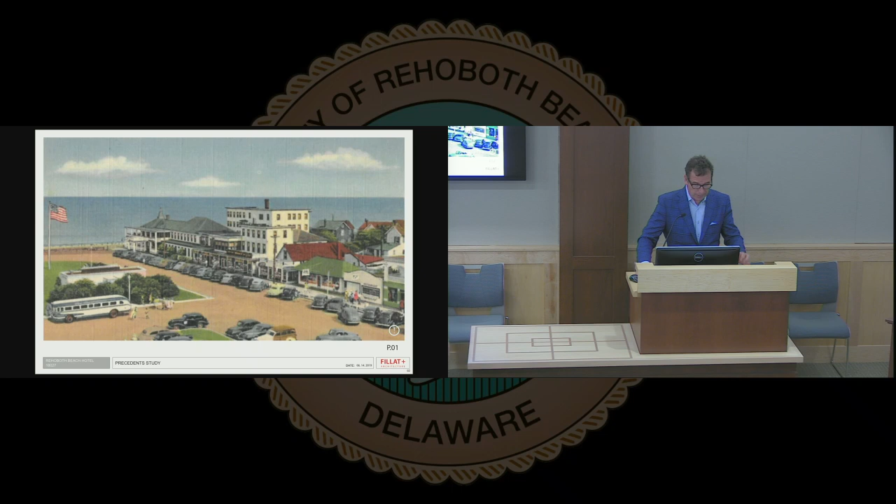Just to take you back to a quick view of what once was, and our kind of inspiration for what we would like to be. That is a building that is a beautiful white structure with fantastic green roofs and architectural embellishments, finials and smokestacks.

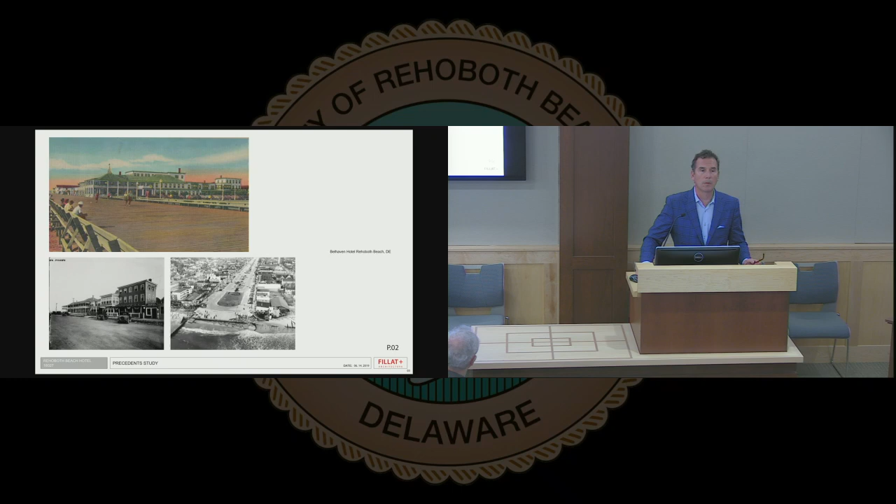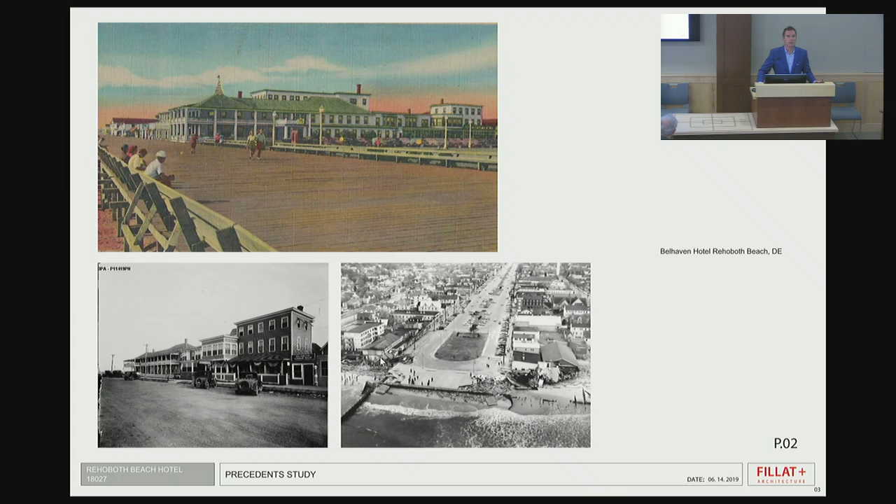Here's another old image of the Belhaven from the boardwalk, both in color and in black and white in the lower left-hand corner. And this is actually a photograph of the storm, where you can see the Belhaven here is no longer—at least the majority of it, or the main portion, is no longer there.

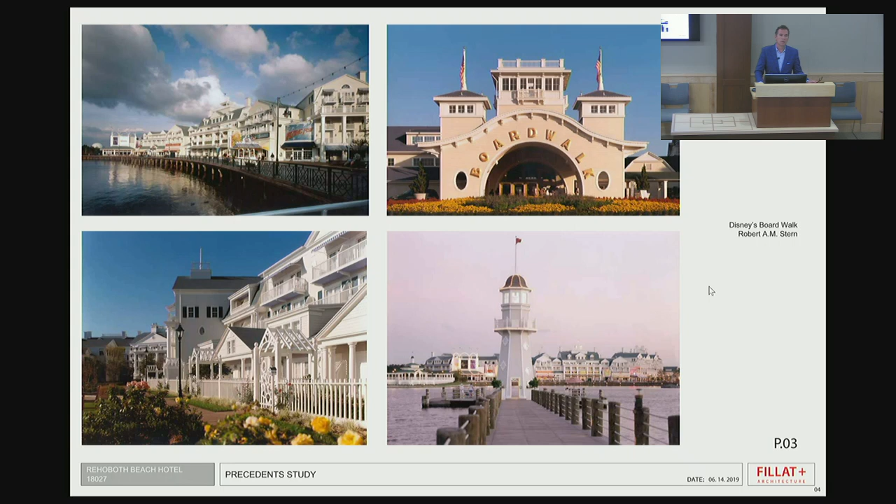I want to go back to our inspiration, the classical inspired grand hotels that have been built with contemporary materials and contemporary demands of the upper-end traveler. Disney World is a great place to have those kinds of facilities.

Really interesting, these buildings have this architectural character—the masses of the roofs are sloped, they have color, there are finials, cupolas, balconies. All of this kind of architecture, these buildings were actually inspired by the Belhaven. They just didn't know it, right?

Let's go through the site real quick, then I'll go into the floor plans. Here's our site—it's kind of a zigzaggy site. It meets the corner of the boardwalk and Rehoboth Avenue here, and then it runs along Wilmington Avenue, just half a block or half a building off of the boardwalk in this location.

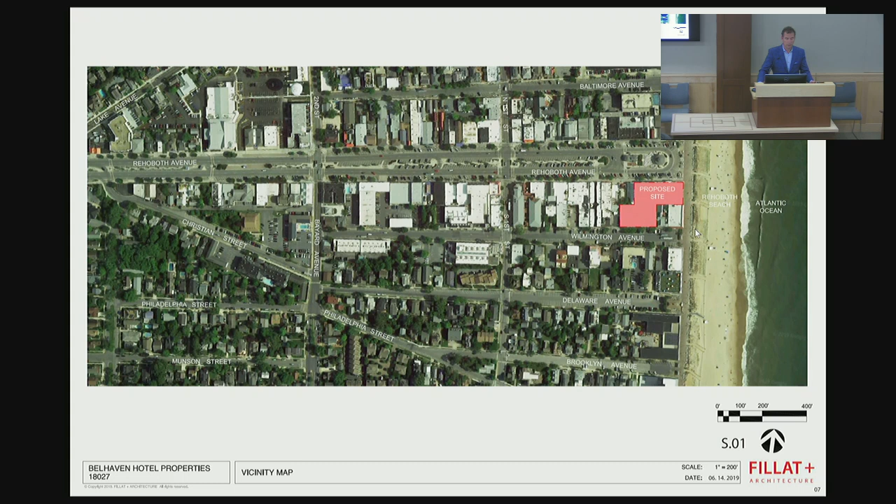So what we were able to do is maximize the parking. As we've talked about, there's 110 spaces below grade, but thanks to our forward-thinking attorney, we've shown where scooter parking can be and where bicycle parking can be. So it's not just a parking garage for cars, it's for alternative means of transportation.

Underneath the ramp here, this is the entry ramp, that's a good spot for bicycle parking. Adjacent to these stairwells, we have enough space to put a little bit of scooter parking and that kind of stuff. Who knows what they'll invent next? Maybe motorized surfboards.

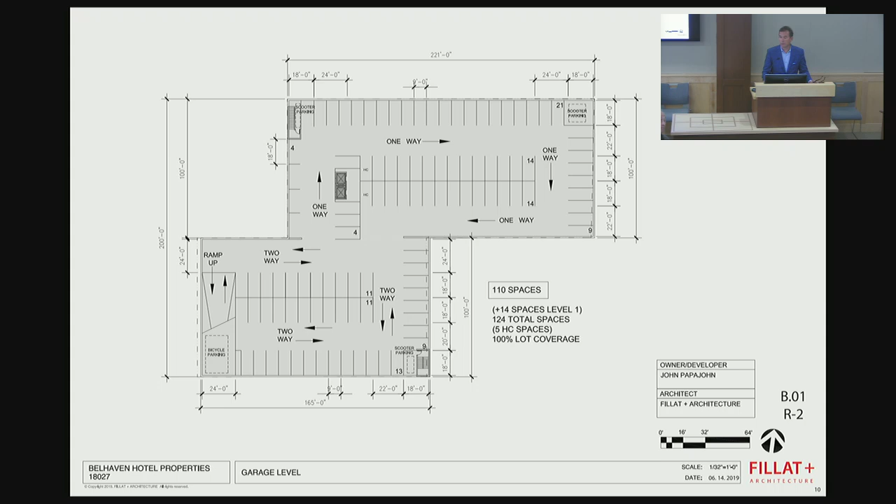This is an exit here. This is the other exit from the top of the building here. This is an exit from the parking garage, and this is an exit from the parking garage over here.

We've got another 14 spaces in this area over here, which is sort of covered, and that's how we get to 124 parking spaces. There's a couple of handicap parking spaces right next to the porte cochere, and the entrance to the parking garage is over here off of Wilmington Avenue. That's the entrance and exit to the below-grade parking.

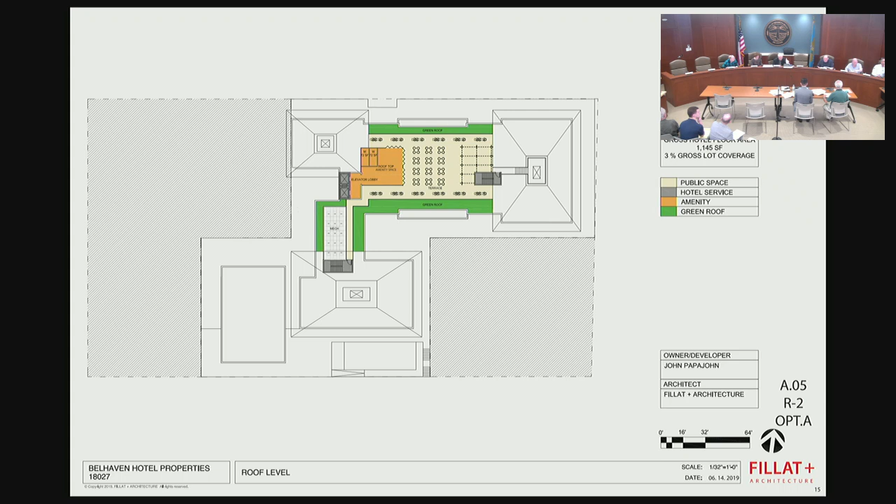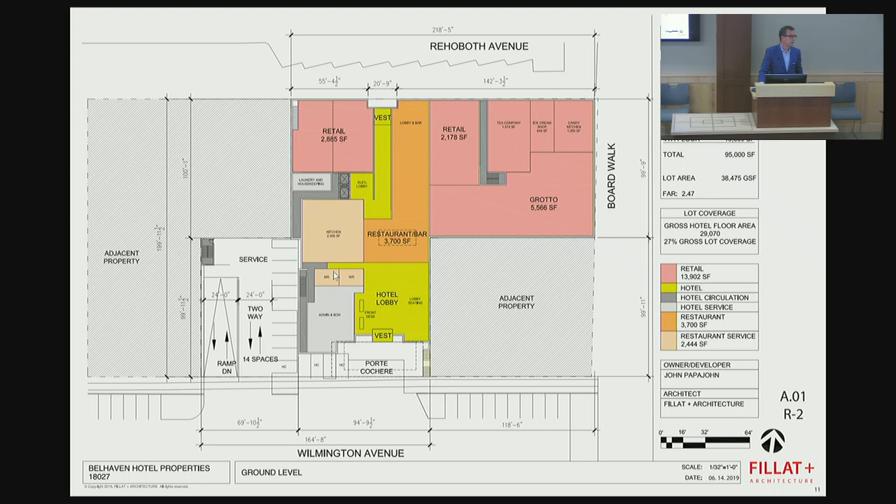So what happens is that stair, because this is a taller space, runs over top of this corridor, right? It connects right there—that's this staircase. It goes up and connects directly into that stair.

On the upper level of the building is another little articulation here. There are balconies—this is the only place where there are shared balconies. We did this to articulate this edge of the building and make this piece feel like 3 stories as opposed to 4 stories.

You can see that the building steps back along Rehoboth Avenue, along the boardwalk, between us and the building adjacent to it, between us and the lot adjacent to us on Wilmington. And then there's a large setback off of Wilmington Avenue because that's where the pool is.

I want to go back a minute. We pulled the ballroom out so that this ballroom will be divisible in 3. There will be a divisible here, there'll be another, and it'll be 2 in a larger room here. This room will actually be able to see the water—you'll be able to be in there, look over the pool terrace and see the ocean. That's the reason why we did this, and it should be really spectacular.

Typically, if you've got a ballroom, you're probably serving food—how is that going to get there? That's a good question. This gray area here is the service corridor. We'll actually double use this elevator right here, so if you're a ballroom guest, you'll push the button in these elevators and you won't go towards the guest rooms, you'll go towards the back. This orange is the guest circulation, and it also has access out to the terrace.

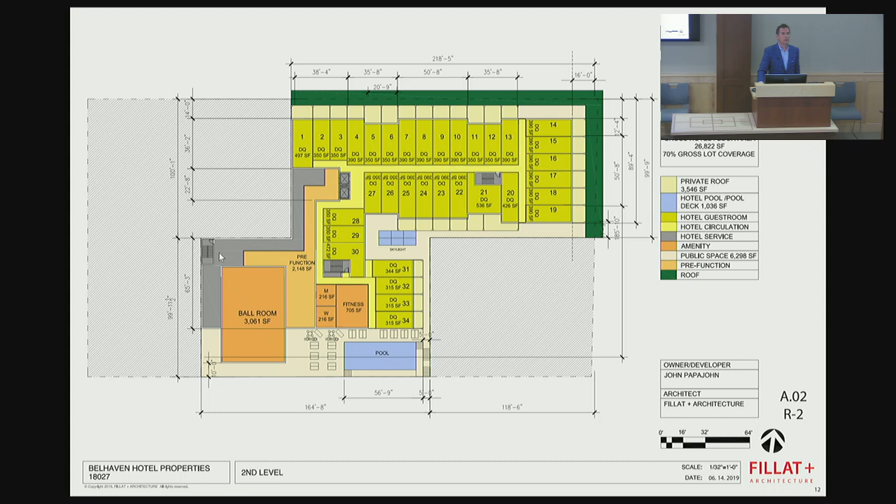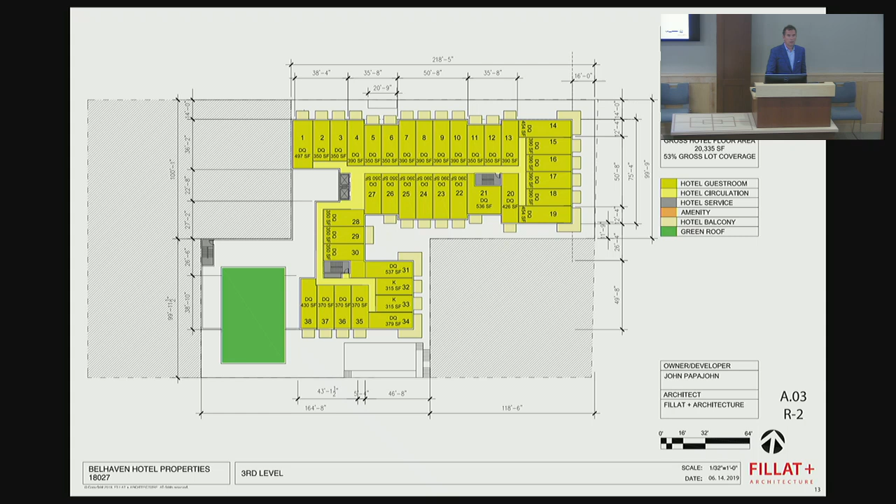Okay, so our last wish list item is the opportunity to use the roof as some kind of hotel amenity space, a sun deck, call it whatever you'd like to call it. As a result of that, we have 3 options for doing this.

The first option basically has a small enclosed space with a terrace and restrooms, and it's located kind of in the middle of the block. This first option articulates 3 pavilions—1, 2, 3—and a finial on top of each one. They are inspired by the big roof of the historic Belhaven. We believe this is probably the most invisible of the roof terraces we're showing you.

We were also thinking maybe you could do something where you'd have a staircase coming up and wrap around the finial, so you could actually get up here, walk around the finial and look out and see the ocean. So it'd be kind of spectacular.

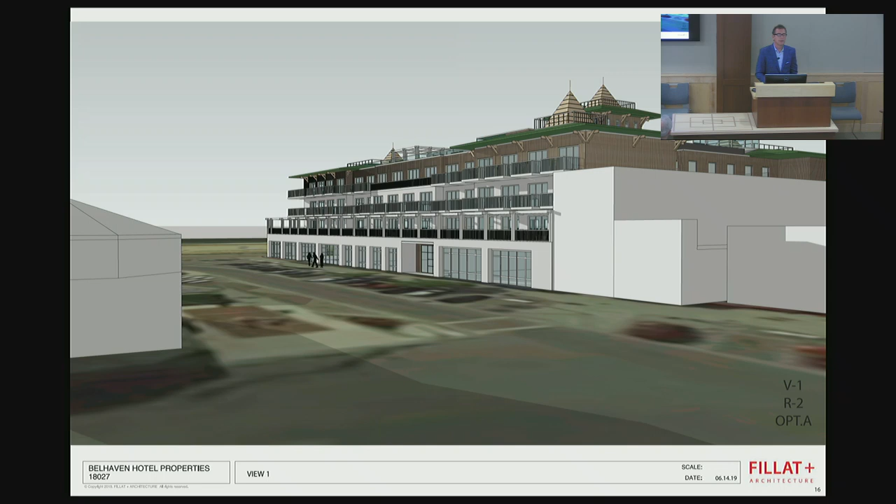So this is a series of images showing what this looks like—these are the same images. The only thing you really see here is a little trellis space that covers part of that rooftop. The elevator overrun, we decided to make something out of it and make it sort of the tallest of the pavilions. And then you see that there.

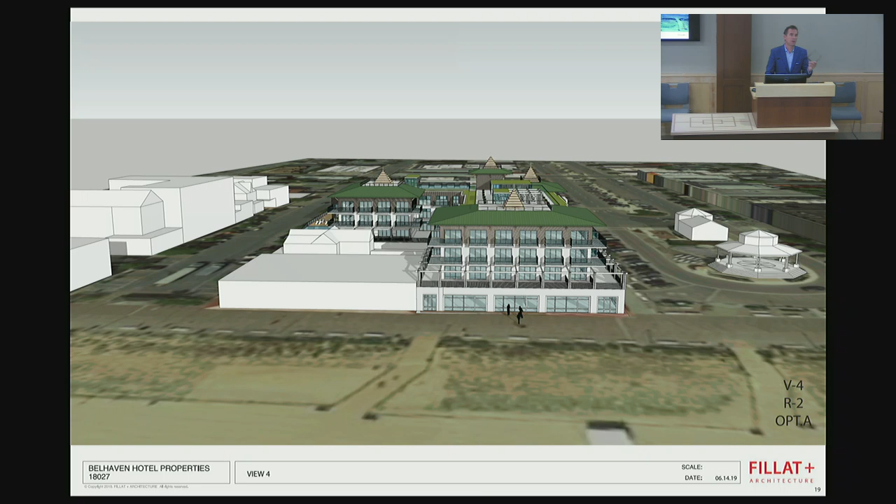So this is coming down Rehoboth Avenue, looking at the building—there's the roof terrace here. As you can see, even though we're up in the air with these views, you do not see very much of the roof terrace. These are the same images we showed you previously, so you have an opportunity to see the apples to apples view.

So this is what we're calling option A. Here you can see there's the roof terrace, there's the pool, there's the zero edge pool, and the private roof terraces.

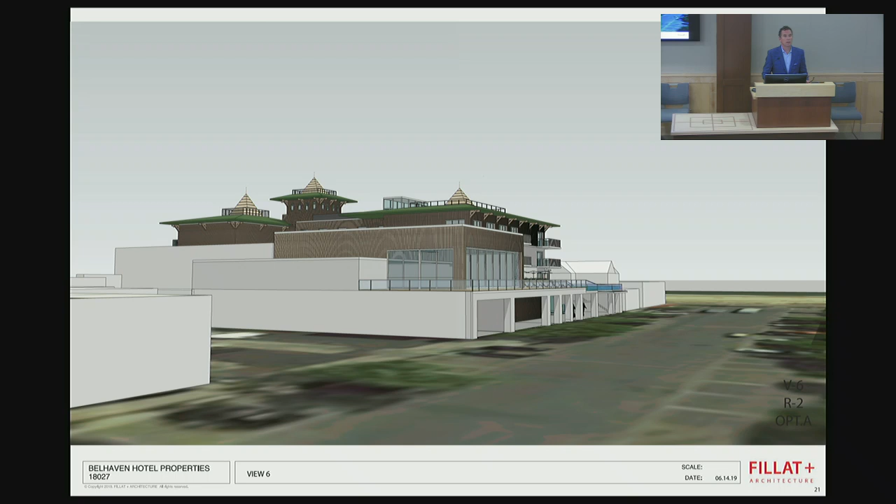Is the building height in option A the same as the one you showed us last month? Yeah, the building height is always 42 feet, typically. We did have a conversation about raising the building height for a bigger, taller restaurant space, but we felt that was too big of an ask. So our eave height is 42 feet. But option C is taller than that. Well, all of them are taller than that because they have the rooftop enclosure.

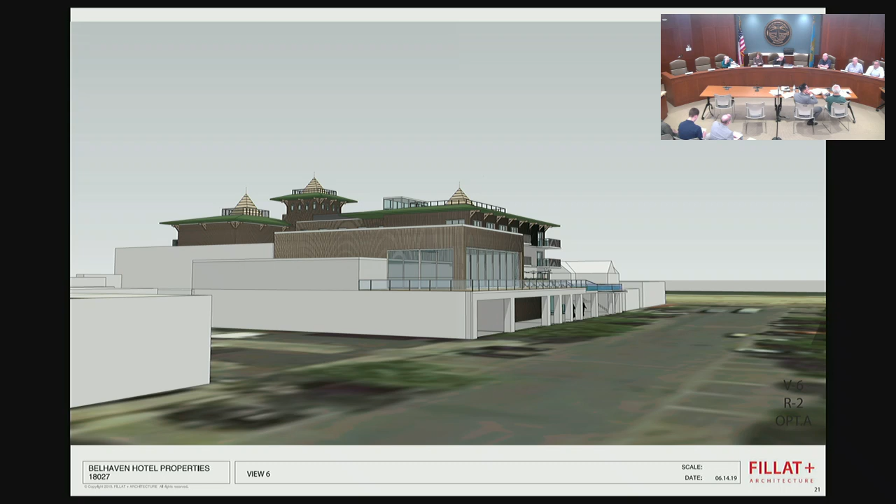So the mass of the building is always 42 feet, but they all have a rooftop enclosure where it's taller—that's an additional 15 feet because of the elevator overrun. And to use the rooftop, you need 2 means of egress.

Am I correct about needing 2 means of egress? Yeah, right. And they're shown on the plans. I'll show you the plan. Let me just blast all the way through this option, okay?

So one of the thoughts we had after looking at option A was that we have these kind of cool roofs. Why don't we occupy one of the roofs and make that the pavilion? So rather than have a separate bump-out box here, we made one of these pavilions taller. That's what we did in option B. We took the pavilion in this corner and made that the place where it would be taller.

And so there's the amenity space, there's the roof terrace, and the 2 elevators that connect to it. There's one staircase that connects this way, and there's one staircase that you walk through the outdoor space to get to, the elevator, the second stair. All right, so this looks like this.

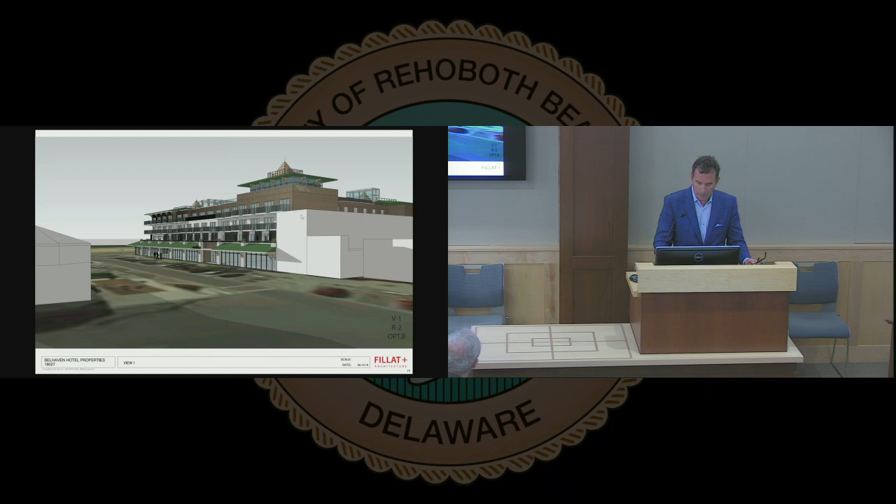We thought this was really an interesting solution because it takes the tallest part of the building and moves it away from the beach, which, if there was a concern about that, this would be successful. But what it does is it actually puts the height of the building right adjacent to our neighbor. So, with one solution, there's another problem.

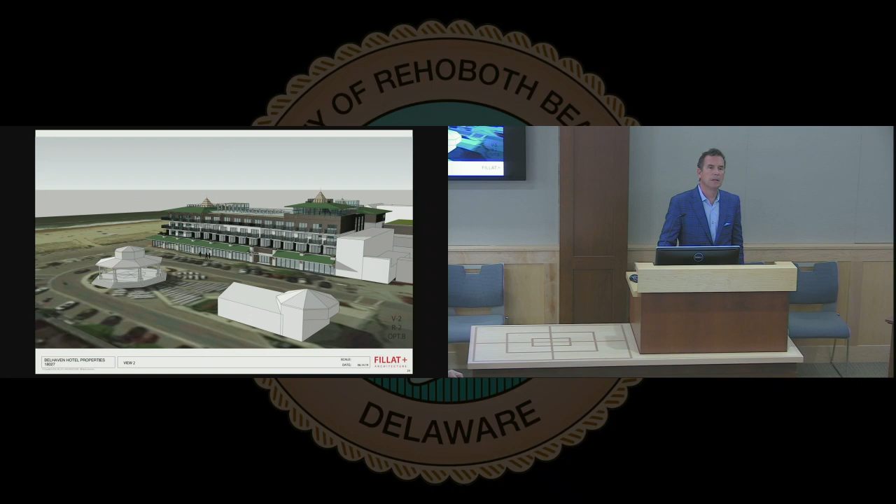So this is just walking around that alternative, and you can see that we really like this scheme. It makes a beautiful space out of the pavilion.

And the second part of this design that's different than the previous solution is that we eliminated the second level structure, and we put a continuous cover over top of the sidewalk along the building's edge. The reason we did it is we took the green second-level porch of the Belhaven and put it down on the ground level. It was something that John felt was really important for us, as a place of refuge during the rain and for people getting out of the sun.

So we felt this was a good solution for that. Maybe it's a little too much of the same all the way around the building, but it at least articulates the idea in a good way. And we feel it still keeps that character.

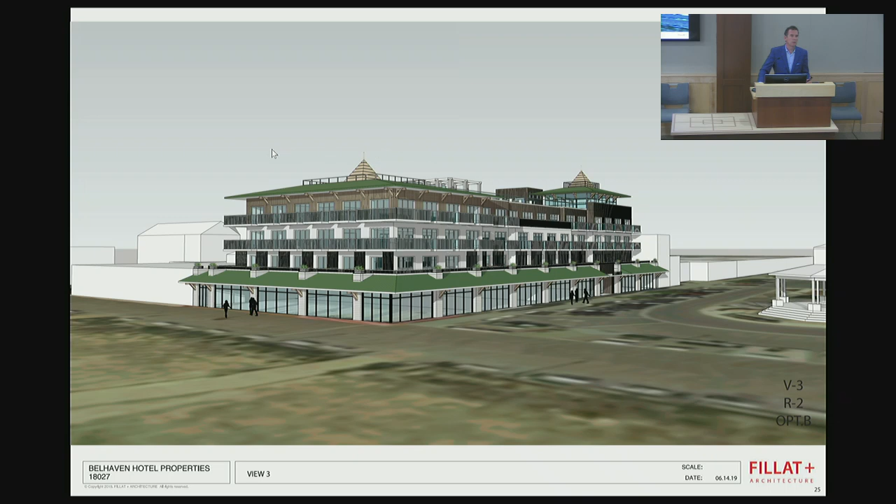So you really have a roof here on the ground level, or at the first floor, that creates a nice human scale, pedestrian scale along the base of the building. You have nice balconies that are uncluttered above, and then the character of the historic rooftop and second level. How much of an overhang? 6 feet. 6 feet? Yeah.

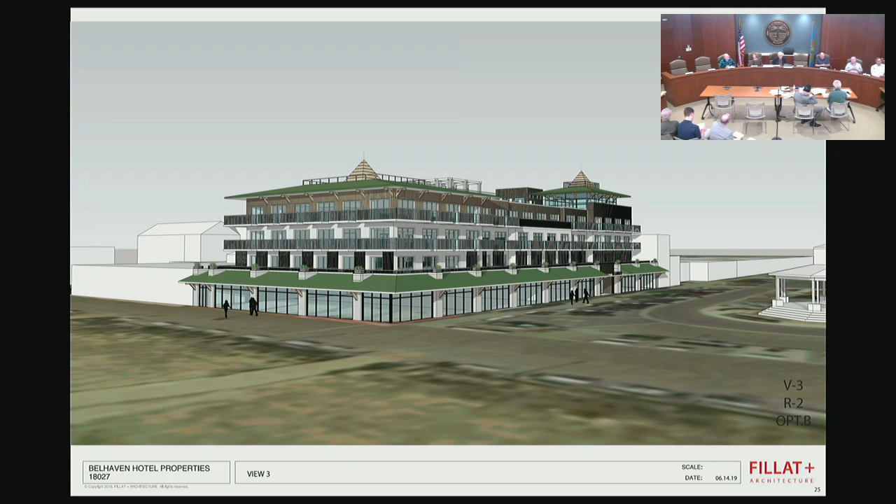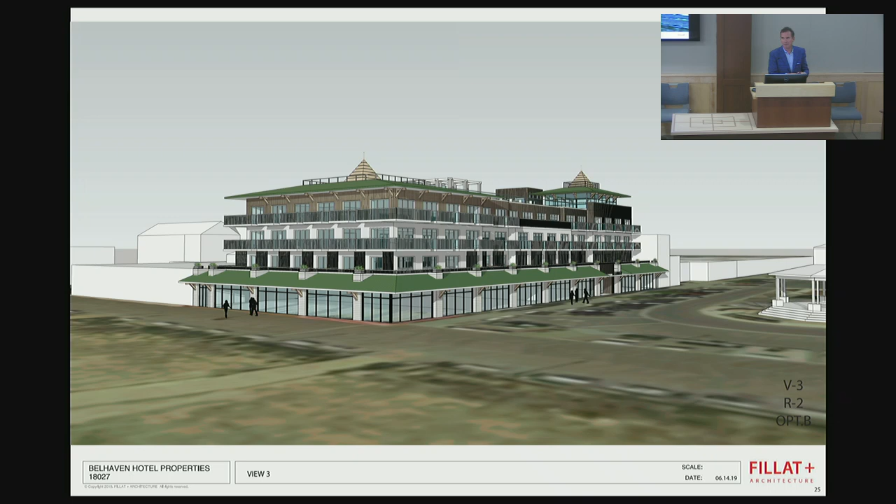Is that out over the sidewalk, or just to the edge of the sidewalk, and you've moved the building back in? No, it's out over the sidewalk. And we know that's not a code-allowed thing, but that's what existed, that's what the Belhaven had before. That's what existed before you had a code. And there's a reason why people did that, and it's called the sun, right? For some reason, somebody wrote something that said protecting people from the sun shouldn't be allowed anymore. I don't know why that is, and maybe none of you know either, but that's where we are. So this is just what we feel is the right way to do this.

I just wanted to add, the overhang there is about 6 feet now. It's already there, it's been there for years. Right, but it's non-conforming. I understand that, but it's already there. I don't know if anybody's complained about it, I don't think so.

Frankly, I was glad to see it for two reasons. One, in the umbrella business, people would run off the beach, but they wouldn't leave, because they could go stay under there until the thunderstorm passed, and then come back down and rent more umbrellas. That was one. Number two, the tenants say they appreciate it for the same reason, because it keeps people there rather than running back to their cars, creating a traffic jam and trying to leave town during a thunderstorm.

So this image here is kind of what we still consider our money shot. It does show you the double-step roof, kind of the way the old Belhaven did as well. So we'll just keep going around here.

The roof here is relatively uncluttered. There is the elevator overrun. It's sort of separate from the pavilion, and it's anticipated that the pavilion would have been the main piece of

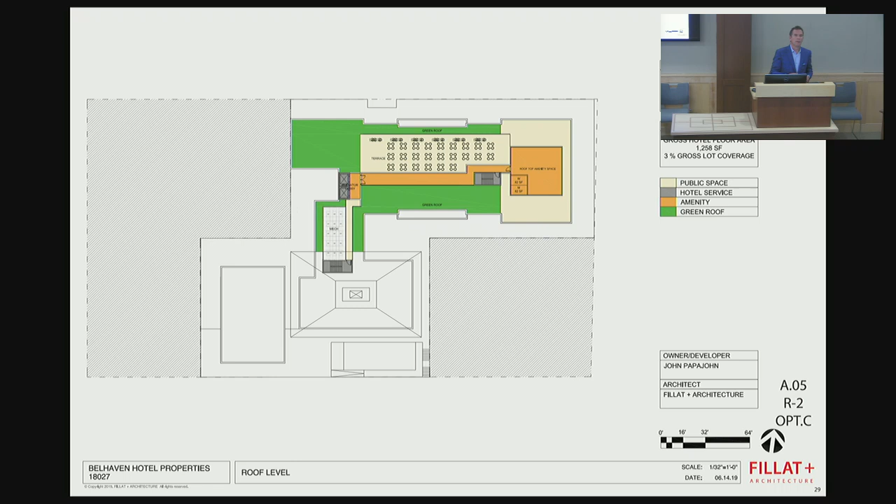the articulation of the design. So our wish list is to actually use the site for its strongest and most successful resolution. Option C takes the pavilion and puts it where it should be, on the corner of Rehoboth and the boardwalk.

What we did do, though, is make the pavilion smaller than the footprint around it. You can see that this square here is not as big as the full roof of this wing of the building.

So it's actually a smaller pavilion than the roof of the previous scheme, but it's also a more logical kind of thing, like a turret, or a little architectural embellishment. And then we also thought that maybe what we could do is just take it off of

this corner here and allow this part of the building to be a little better neighbor in terms of stepping up to the adjacent property.

If you look at the way the old Belhaven was, the architecture at this end was really flat roof, just a simple, almost like an old townhouse building. So we're kind of using that as the precedent for here.

We did introduce the second pavilion roof along the entrance. We feel like it's iconic and it would be a great thing to have at the front door. So this is kind of the bigger roof like we showed on the previous schemes and a smaller roof over here.

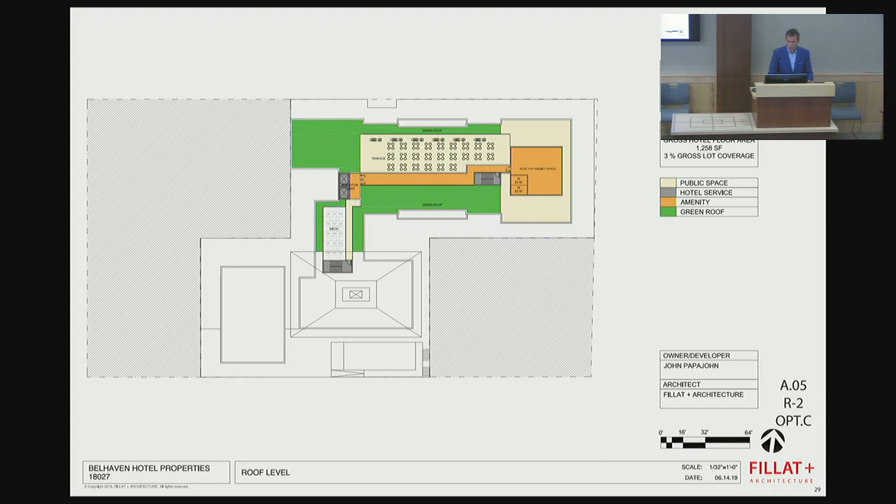This is an indoor-outdoor connection between the elevator and the pavilion, in that in good weather these will all open up and be almost like a covered pergola. In cold weather, it'll be closed so that you don't get cold on your way out to the event space. This scheme is what we're showing as the

full wish list. If you look, the building shows a 14-foot height building at the edge of the sidewalk. This shows you the 6-foot

overhang here. The architectural character we're trying to develop around the base is similar to the architectural character we're developing everywhere, reminiscent of and inspired by the Belhaven. This shows the ground level roof coming all along.

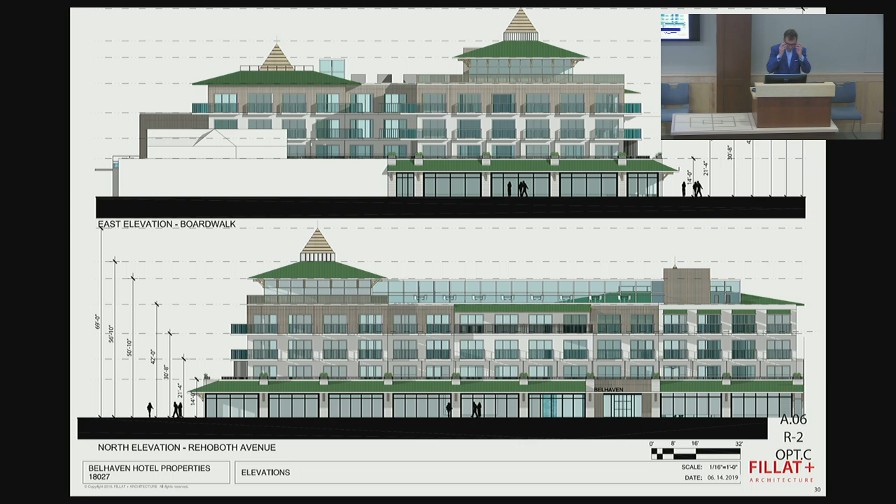This is the elevation of Rehoboth Avenue. There is the pavilion and the main finial in this location here. You can see in the top drawing how the building does step back and create this kind of symmetrical, formal, but really iconic solution to having a roof space on the project.

The next drawing shows the rear elevation. This is the elevation adjacent to the properties. This is the elevator overrun. There's the pavilion in the background. This is the front pavilion, and that's the ballroom there.

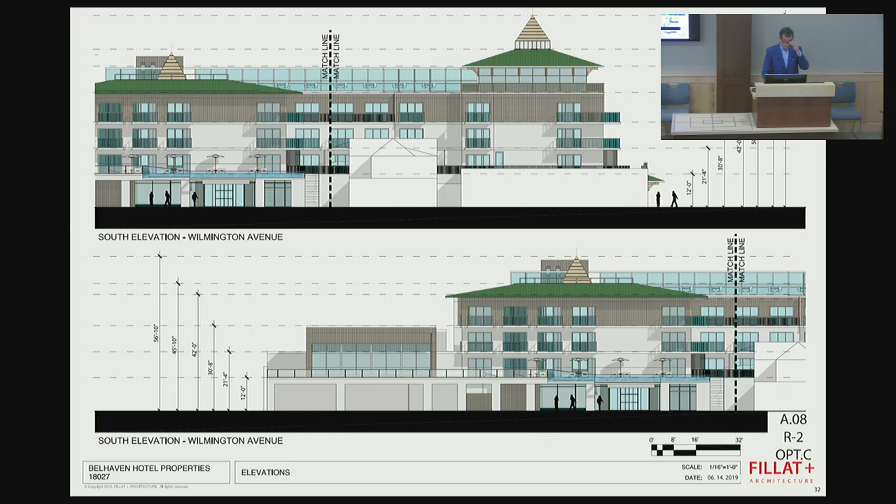The floor-to-floor height, the guest rooms will have a ceiling height of about 8'9". So it's a little bit more than 8 feet, not 9 feet, not 10 feet, but a little more luxurious. It should be a great room height for the proportion of the room.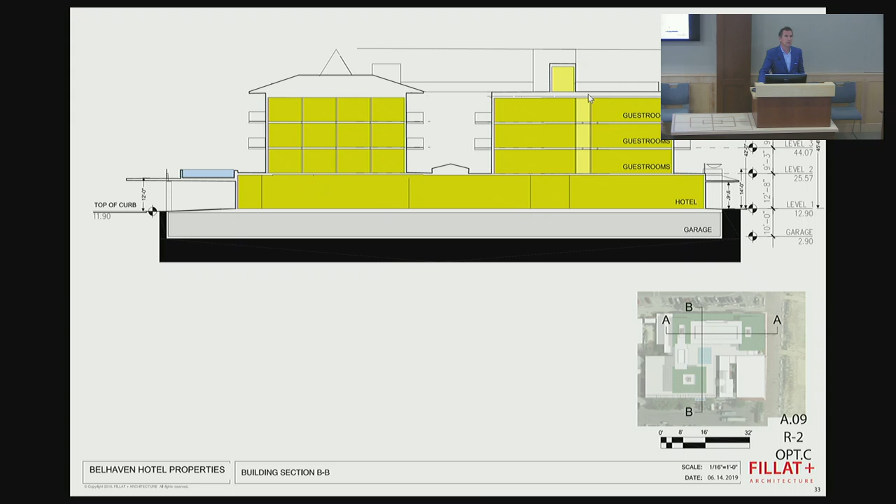The ground floor space will have, again, a 12-foot to the underside of the slab. This is a concrete building, so it's a flat slab. And then the top floor actually has an extra 1.5 feet here, because of mechanical and for the living roof and the

waterproofing for the roof. The next slide is a really good diagram. It shows how the majority of the roof is 42 feet, and how the building does step up and create this amenity space, architectural embellishment, and also the finial and the character of the old Belhaven.

And then it shows how it steps back. This is the setback—there's the terrace for the guest room, and this is actually the front. So all of this is set way back off the street. The distance between the face of this and that is 15 feet, and the face of the building on the ground level and the face of the building on the guest room level is also 15 feet. The enclosure of the amenity space is another 6 feet off of here, so it's set back 6 feet there.

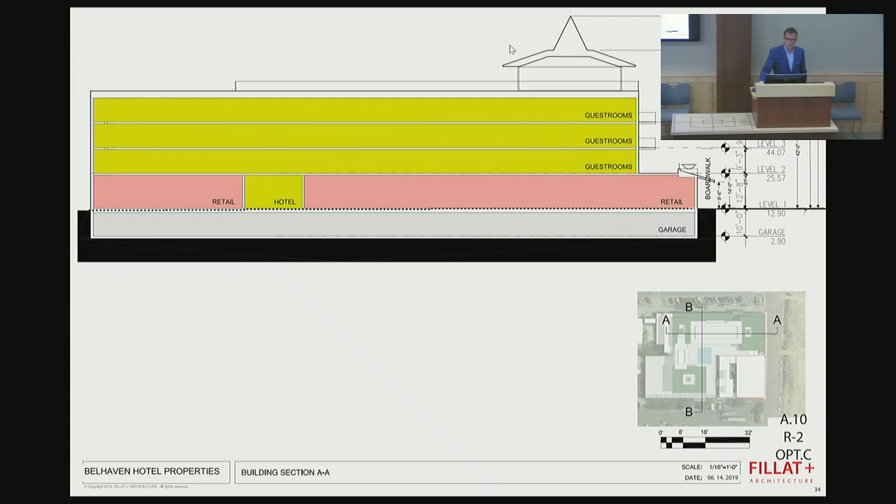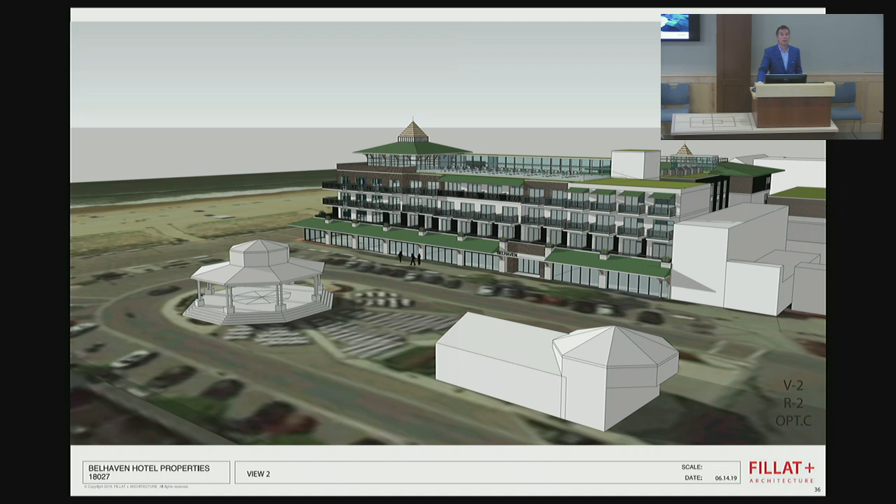Here we are moving around the project. This is the connection between the elevator and the pavilion—that's an indoor-outdoor connection there. And coming around, you can see the way the building now really has a fantastic presence. It's definitely an iconic solution to the property.

So now one of the things you guys asked me to show you was a shadow study. Before we go to that, do the design heights that you're showing accommodate the quote-unquote penalty for being in a floodplain? They do not—they are at 0, right? The diagram and the discussion of the 1 and 1.1 foot is something Susan is going to address, but these drawings do not account for that. They assume 0 is 0, and 0 is 13, or 12.9 or something like that. You have to go up another foot because of the floodplain.

Yeah, so the way this building hits the street is really important, and we need to make sure that people can walk in right off the street. Whatever we need to do to make that happen is important, because that's going to be the best guest experience. So how we deal with the floodplain—maybe there's a change in elevation once you get 10 feet into the building. But in terms of flood control, we are proposing that between each of these openings, they'll be designed so that we can put movable flood barriers in between and lock them down, so the building will be able to be fully dammed to stop water. That wall will probably be much taller than 1 foot—probably like a 4-foot wall. So the windows are all set back to allow that system to happen.

And we did a building like this in the Inner Harbor in Baltimore, and it's a pretty good solution—mountable and demountable. Have they used it yet? No. How old is it? They put it in 3 years ago. But the big one hasn't hit lately, so. But we're not the ones that call the shot on that—DNREC is. That's right, and we'll work with them. That solution was acceptable to the Army Corps office in Baltimore.

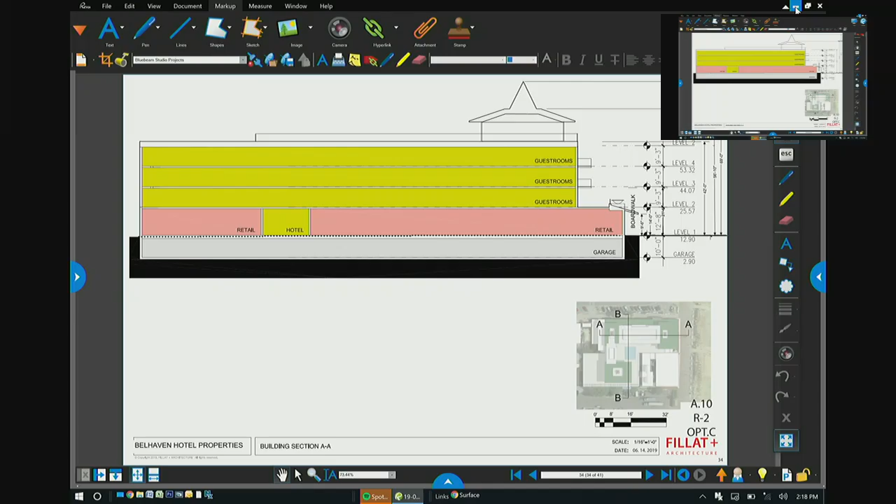Let me try to get this out of here. Okay. I asked my guy to text me the days because it blacked out. Let's see if he did it.

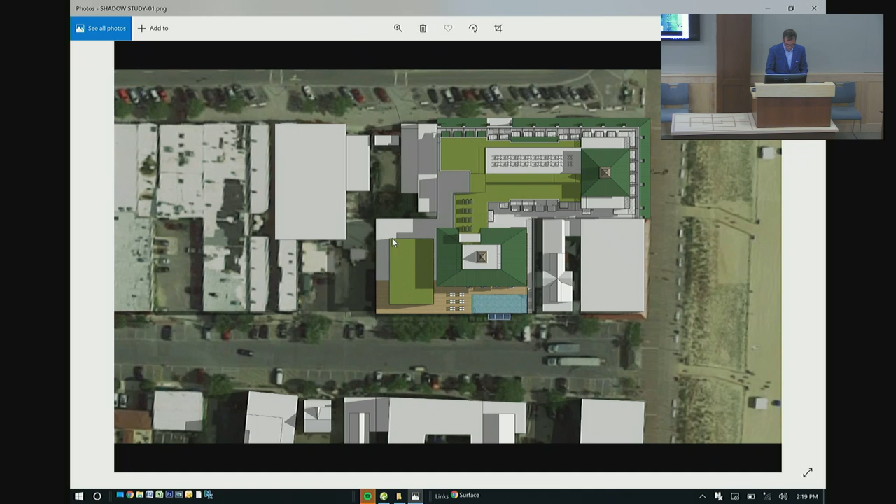The first day, what we did was take four times of the day—9 o'clock, 12 o'clock, 3 o'clock, and 6 o'clock. The first set of images is May 24th. This is 9 o'clock in the morning, and south is here, so east, west, north—Rehoboth Avenue is north, beach is there. This is 12 o'clock, May 24th. This is 3 o'clock, May 24th. This is 6 o'clock, May 24th.

Next is May 29th, five days later—9 o'clock, noon, 3 o'clock, 6 o'clock. This is June 21st, somewhere around the solstice, right about now.

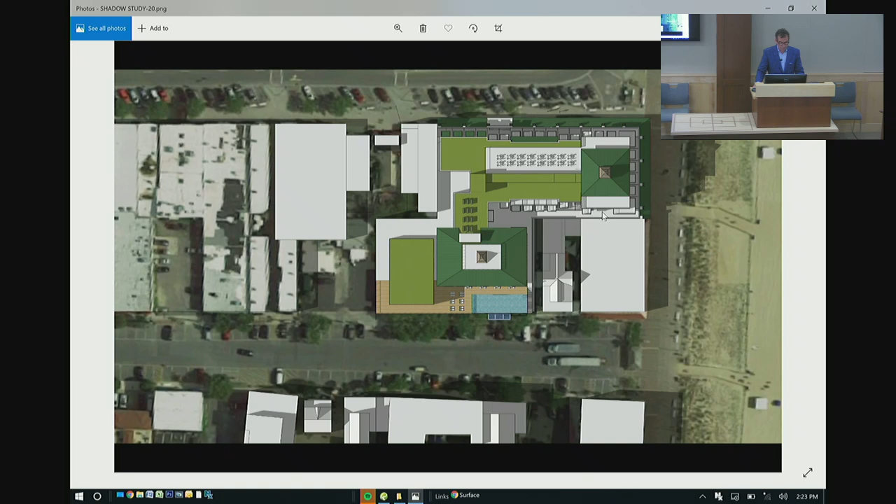All right, so now for the really best part of this presentation. Are you excited? I'm excited. Yeah, you'll rent plenty of umbrellas.

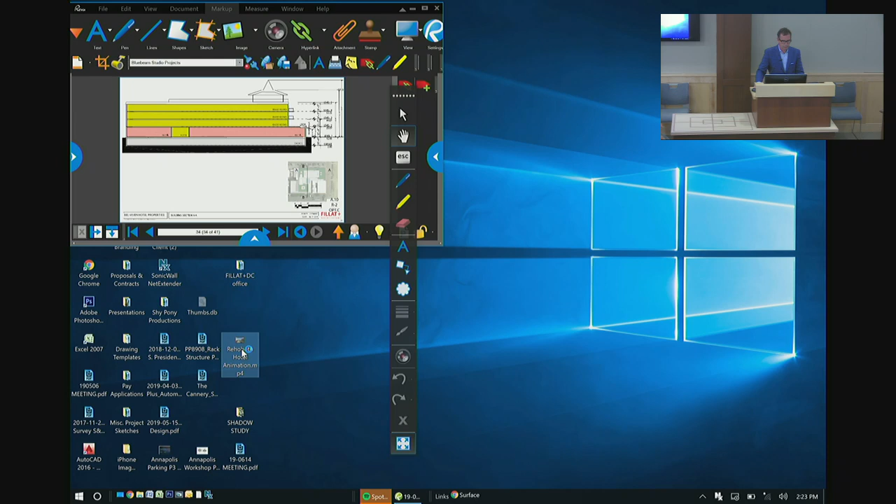So we have the ability to do animations. A picture goes a long way, but 3D animations go a lot further. This is an in-house deal, so I'm going to push play and pause.

So we are now coming down Rehoboth Avenue. This is Rehoboth Avenue, and down there is our hotel. Maybe this is the Candy Kitchen, I'm not really sure—we didn't finish that, and this will get better, give us more time and we'll fill this in. But this primarily deals with just our architecture and our building on the site. Everything is to scale—this is really Rehoboth Avenue, and we'll talk a bit about the beach in a minute.

Can I just interrupt for a second? Can you explain the perspective? Is this a person in a car, or a person on the street? You can see here's a tree, so we're probably about 20 feet off the ground. We're gonna start at 20 feet over the ground, then we're gonna go up. So it's like a low drone.

And it's a pretty fast drone. Okay. I'm gonna stop it for a minute. We'll be able to run this a lot.

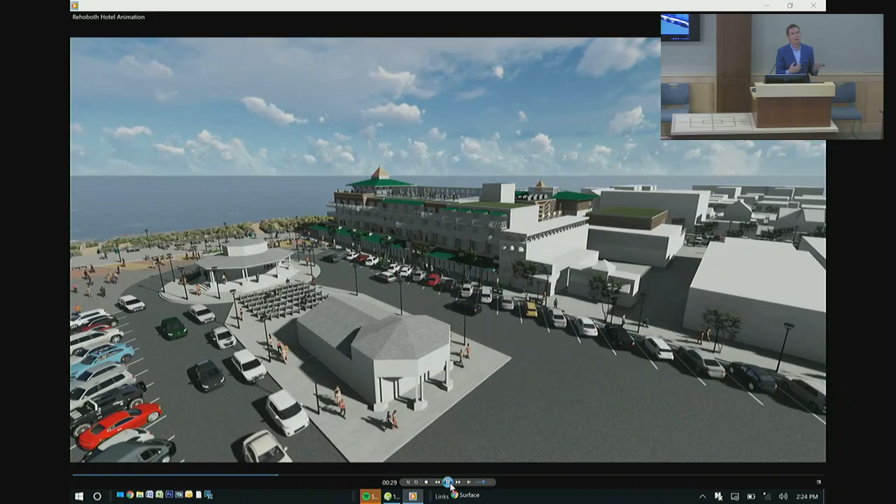So there you can start to see the restrooms. This is the little mall alley there. I'm just gonna let it run, okay? It's pretty exciting. Unfortunately, or fortunately, the sun is really right, and we can't move the sun to the north side of the building because this program doesn't let us do that. So it is a shaded-in building, and it's on the shaded side of the street, right?

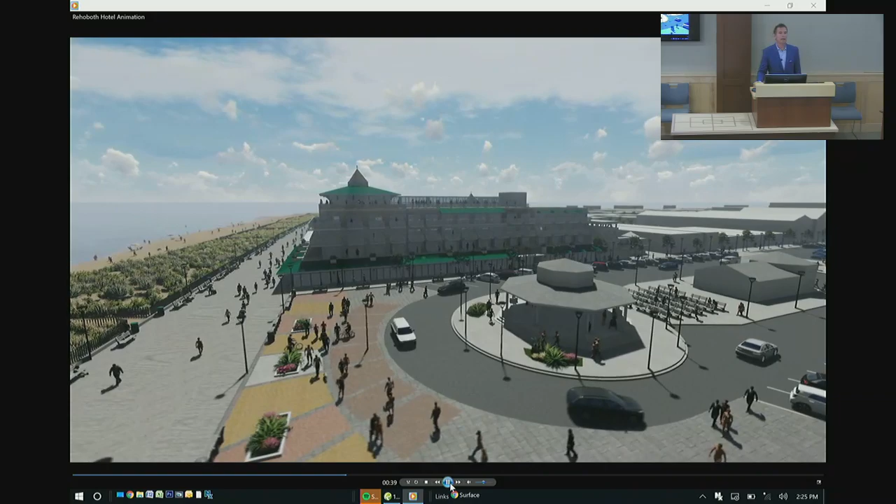So here we are. There's the bandstand coming around to the beach. Here's our, everything is to scale. There's your beach patrol.

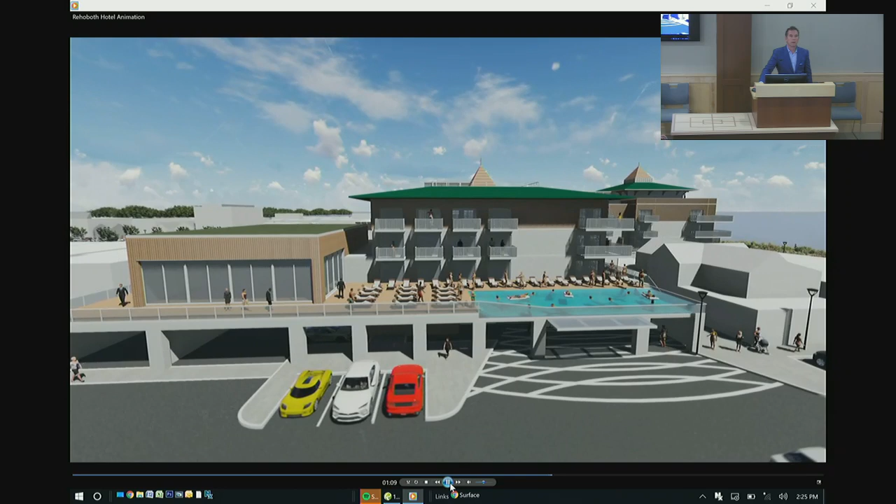Coming up Wilmington Avenue. There's our pool right at the entrance, porte cochere, our meeting space, pool terrace, living roof, entrance to parking, and we're gonna go back around. Coming back, moving back. We've designed it so that people can go from the beach directly up into the pool terrace and then into the rooms.

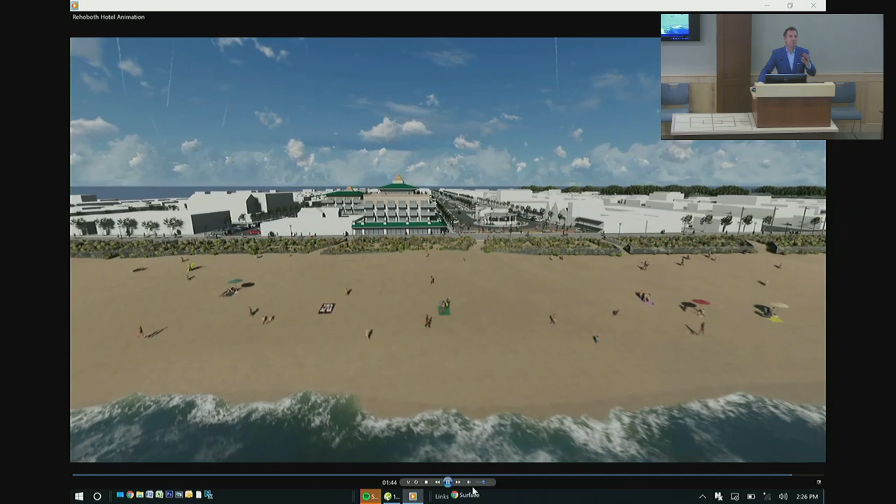The modeler is from the Midwest. I don't know if he's ever been to a beach before, so the beach is lacking people. But he said it's the morning, so it's okay. This gives you an idea of the scale of the building, in the context.

We'll play it one more time just so you can see it. And we'll be able to post this online, and we're going to put more people on the beach now, and you'll be able to see this. But it's a super effective way to look at this.

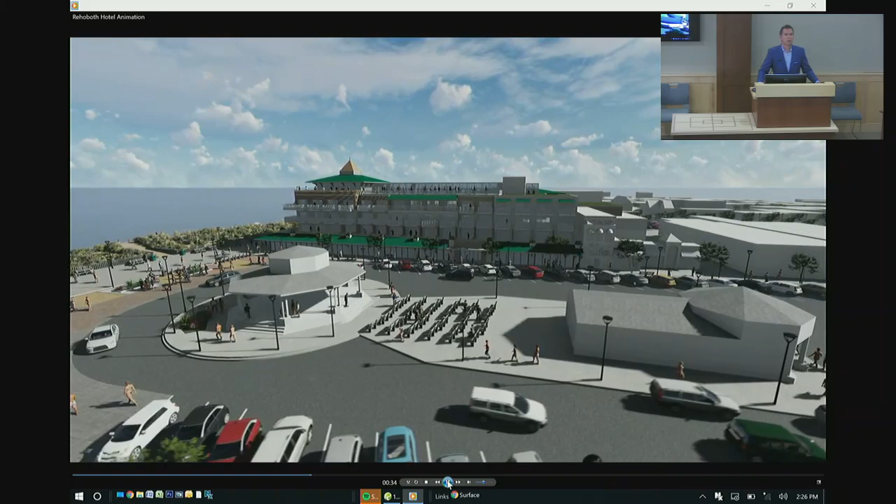Did you say you're going to do a ground level as well? Or a walking level? We'll try to do a ground level. I haven't been able to get them to do a ground level, but I can try. The perception of scale will be very different if you're a person walking down the street. Completely true, we agree. I haven't gotten one yet, but I'll get one. We'll try it for you.

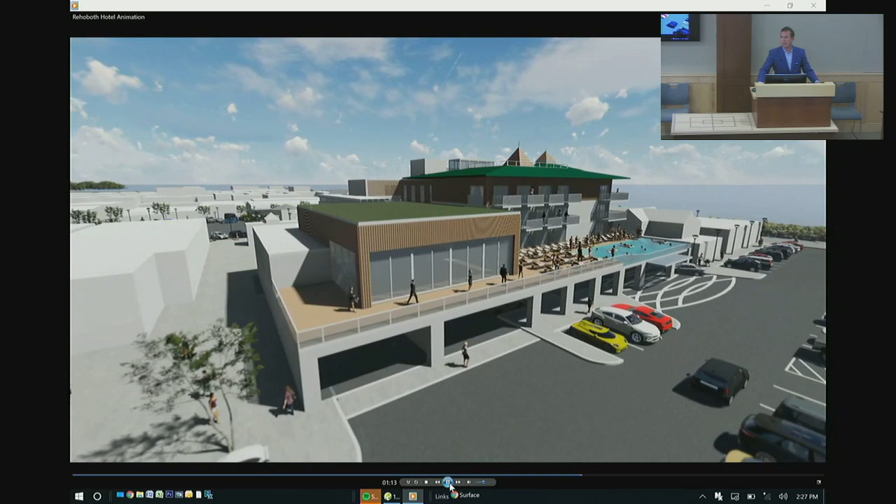So there's the pool, there's the bandstand, and the porte cochere. We're going to get some sound in it too, so we'll have some music, and people playing, ocean crashing, cars, people honking. It's a relatively simple program, so it's not quite as good as it could be, but it's pretty effective, I think.

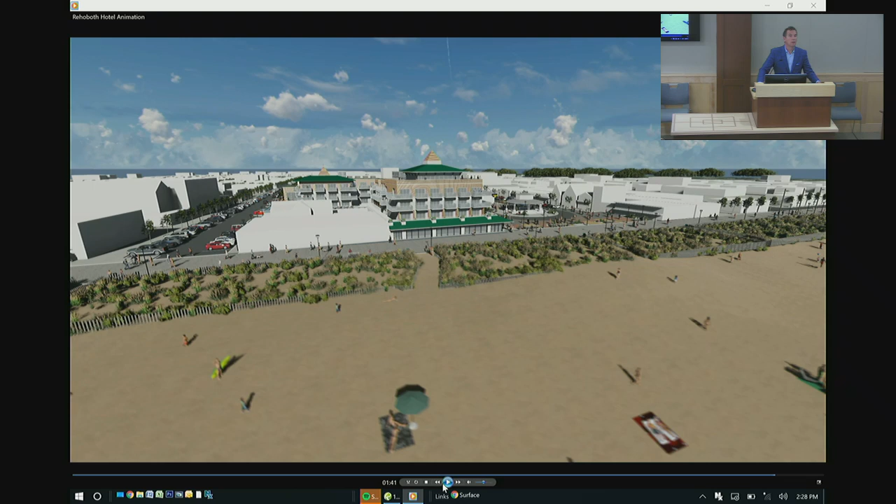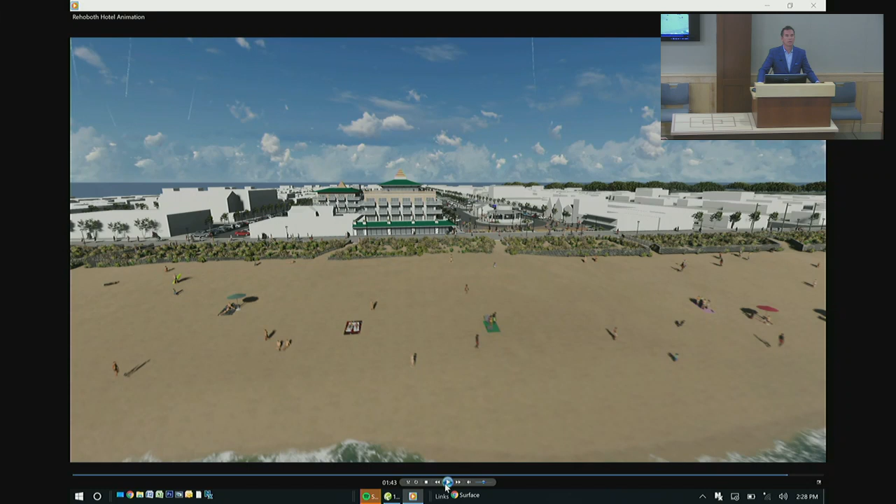What's happening now? We pull away, yeah, we're pulling away, going back just to sort of see the scale of the building and the waterfront. Like there, if you're on the boat, you'll see the building and our, there's Rehoboth Avenue.

All right, so I'm done, and Susan is going to wrap it up, and then we'll. Can I make an aesthetic comment? Yeah. Not to offend, but I think a repeat of the roof overhang that you have on the first level, on the third level, would dramatically improve the optics of the building and give you the opportunity of moving the cupola perhaps further west.

We're happy to look at things. Because if you look at the building, you've created the green roof image on the ground level or on the first level, and then it's pretty stark going up. And I think if you saw a double level of green — you know, I started to do that on one part of the building, I'll show you, wrapped around on the other side, I think.

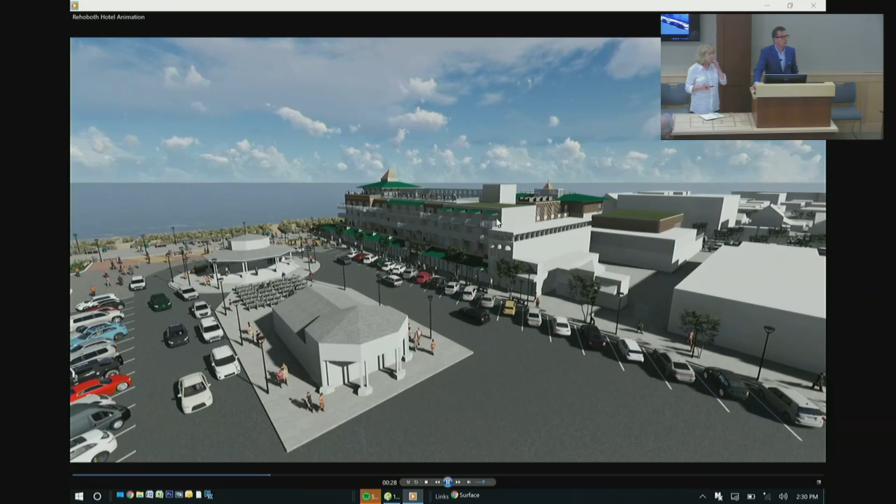Yeah, and also what I was thinking about doing was adding — you'll see it in a second here — you see these awnings up here, right? So if we added them, I had them on this and then I took them off. So it's very similar. Let's see this piece of that roof there. If we added them around this edge, it would soften it a lot and really make it more beautiful. So that's definitely something we can look at in design. I don't know the impact on code, but things like that, nothing major, it's just design.

It just seems to me it's a little stark, blank up here. Yeah, we're happy to look at something like that.

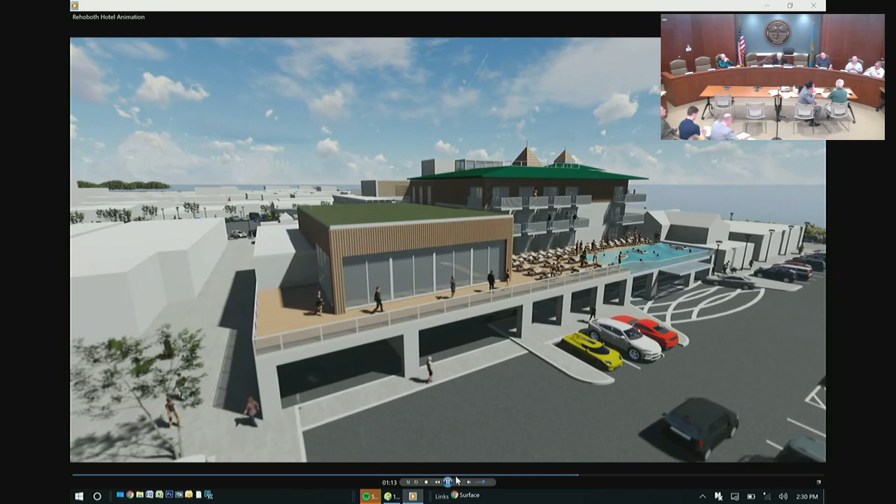One other comment about the animation - it's really helpful in understanding what the design is. I'm having a hard time, I want to see green, but I want to see what a pedestrian and a person in a car sees. That's how everybody experiences it.

I took a note that said the ballroom would have a view of the ocean, but when I look at the animation as it spins around right now, there's another floor and a ceiling. It doesn't look like there's a view of the ocean, unless I'm not understanding it.

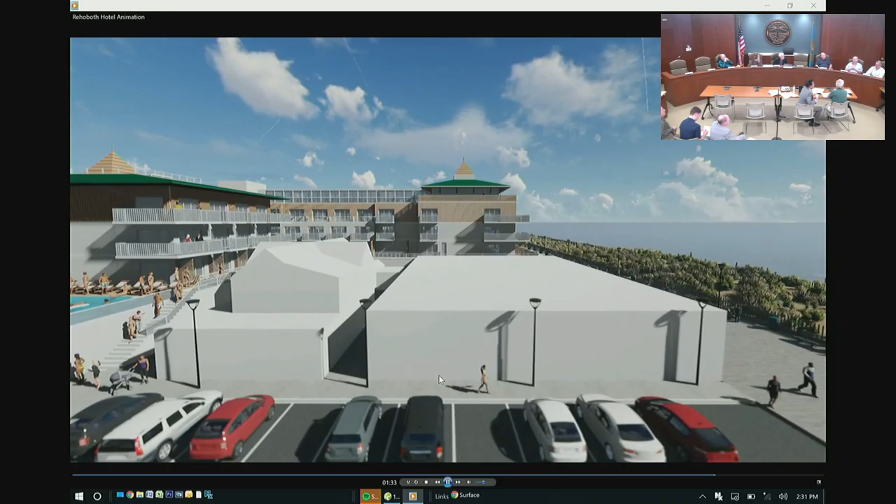Yeah, so it's coming around now. You can see right there - oops, I'll stop it. I don't think I can go backwards. No, there it is, right there. So that is the ballroom window right there, okay? That right there is the ballroom window.

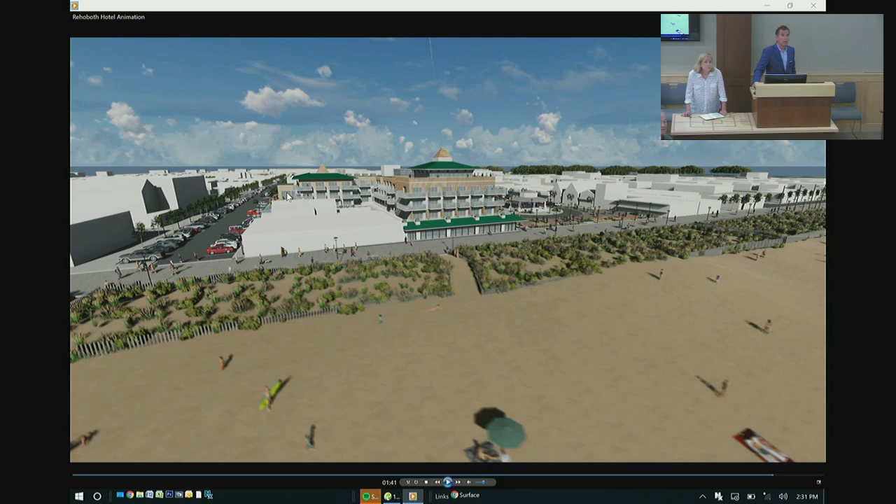Isn't it the top part of the ballroom window and not the floor? No, it's the floor, that's the floor. Oh, is it? Yeah, so you'll be able to see, it's floor to ceiling, you'll be able to see down Wilmington Avenue.

And see the ocean - well, that depends on what's built on the corner in front of it. Well, no, even so, because this building that's built on the corner will have to set back as well. There's a requirement of setbacks for future development of this area, same as this building. So this building will have to be set back 14 feet once it's above the ground floor, and that will still allow this window to have that view.

Well, out Wilmington, not necessarily - out Wilmington Avenue. Yeah, yeah, yeah, absolutely, out Wilmington Avenue. That's why we put it there, you know, so you get that. It makes a lot of sense in a way.

Okay, I just want to clarify one thing too - I like the idea of what David suggested and you had thought about with the third green roof, but it's not actually a green roof. It is green in color for these, right? It's not green environmentally, actually - a green colored roof.

No, what I'm saying is, because there's also a green roof, an environmental green roof, a little bit on the top, correct? So I'm just trying to make the distinction between color and environment - I like to refer to those as living roofs. Okay, that's a good distinction.

Green roof, and especially in this building you have to be careful, because we do have living roofs - they're definitely flat. The green roofs are the metal or shingle, green either way, depending on what. Just making that distinction. And so there is some living roof on the top, right?

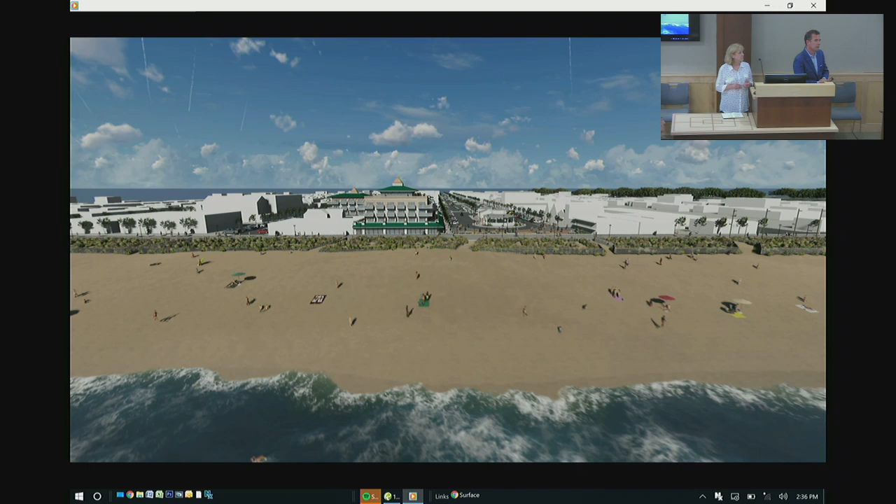So from a lot point of view, 6,000 square feet. Okay, so substantially smaller. Where is it? In Washington, D.C. Okay, all right, well, I'm not just talking about lot. How many floors is that one? It's tall. Okay, so maybe I should be looking at square footage then.

I did the Grand Cayman Hyatt, which is a 4-story building, 140 rooms. It's spread out a little bit bigger, but the footprint is similar to this. I almost think this is sort of an urbanized version of that. I worked on a resort in Bear Creek, in Pennsylvania, yes, that's my building, and that's a 5-story building. And the Ocean City Marriott.

I just was going to ask about that one. So that's a similar size. Right, but totally different architecture. Well, it's interesting because I've been looking at this Courtyard Marriott in Ocean City, and it's 5 floors. It has balconies similar, I guess, to these. How tall is it? Do you know right offhand? Okay, but the volumes, those boxes on the corners, they're pretty tall. Like, they're probably 55 feet tall. But the mass of the, I can find it, I'll answer.

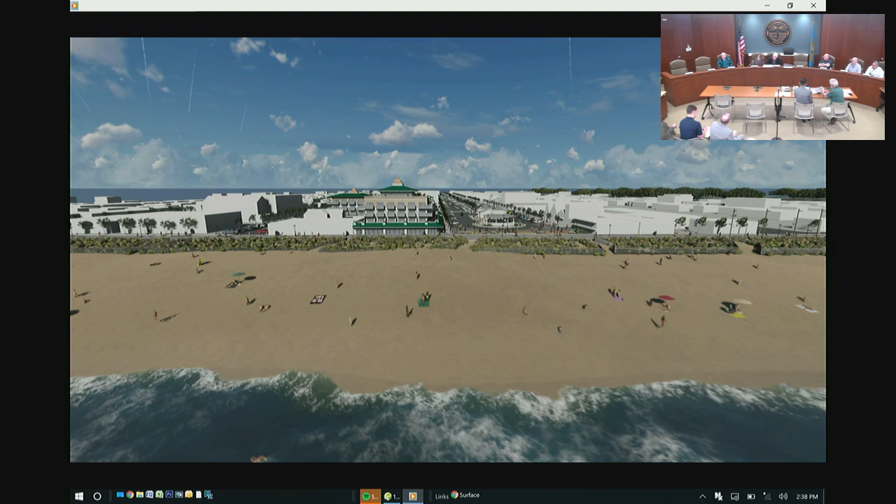I'm just curious, and I can't tell from the pictures here, does it have a rooftop? It's not, it was pre-rooftop phenomenon. Just, if it were built today, it would definitely have one, believe me. But at that point, the market hadn't evolved into that happening for hotels. It would happen for there were still rooftop bars. Right, 2-level bars.

I'd like to correct, maybe I got the wrong impression from your question, about us being developers, so to speak. But we have zero interest in trying to spin this off to anyone 10 years down a trail, or as far as I'm concerned, and my son agrees, 30 years from now. We're doing it for the family and for the town. That's it. No development going out to try and play like I did when I first started investing in the stock market, playing the options game. Boy, it's a zoo. You don't stay in that very long and stay healthy. So that's not our intention.

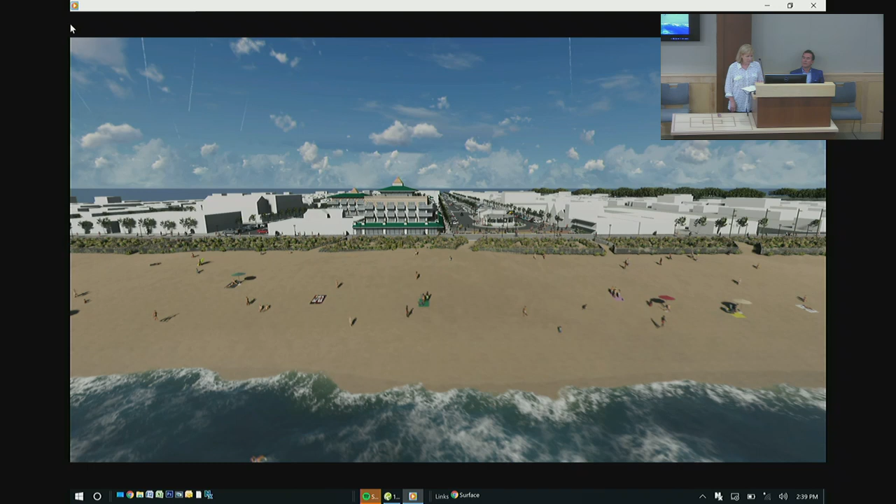Thank you. Hi, Ms. Frederick. We've heard a lot about our wish list today, and we know that we will have to go to the Board of Adjustment, and we believe that's our next step to clarify some of these issues. We need clarification on areas where our determination and reading of the code differs from Dom's a little bit, and we want to make sure that we get heard on that.

I believe I mentioned it last time, that the definitions for gross floor area and FAR speak one way, and then in the second part of the code that talks about the numbers of that, it adds the word structure and speaks a different way. So we want to clarify these things. We also want to clarify including certain things in the FAR, such as the balconies or the pool.

And then we have to talk about the garage, which we went to the city in January and talked about. I wrote a letter to Dom and asked for an opinion on whether that was in the FAR. He discussed it with the city manager and the attorney, and I was told no, because it is well below the flood level, more than 4 feet. And we relied on that, but Dom has reread the code and believes now that it is going to be included. So we need to go and talk to the Board of Adjustment about these issues.

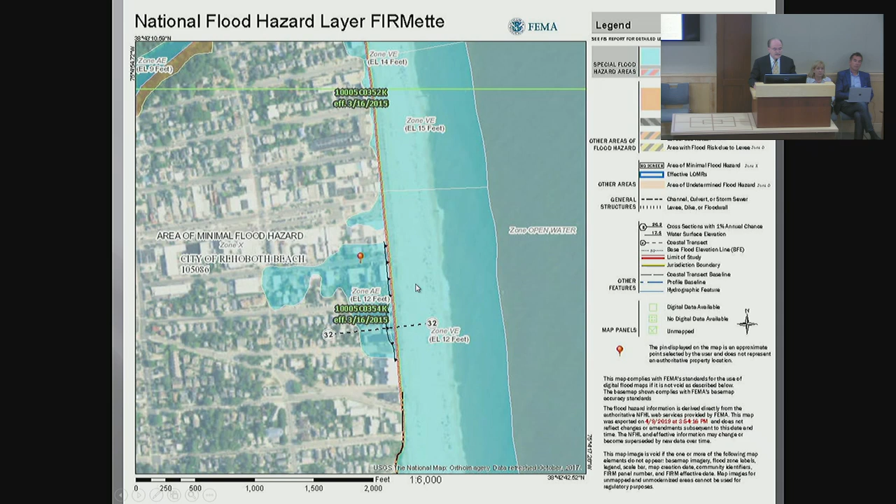So first thing we're going to want to address is, again, the flood zone aspect of the FEMA. Here you'll see the National Flood Hazard Layer, as we now see it here. You see in the green where it talks about Zone AE. However, it's somewhat difficult to see, it's colored in blue to indicate water.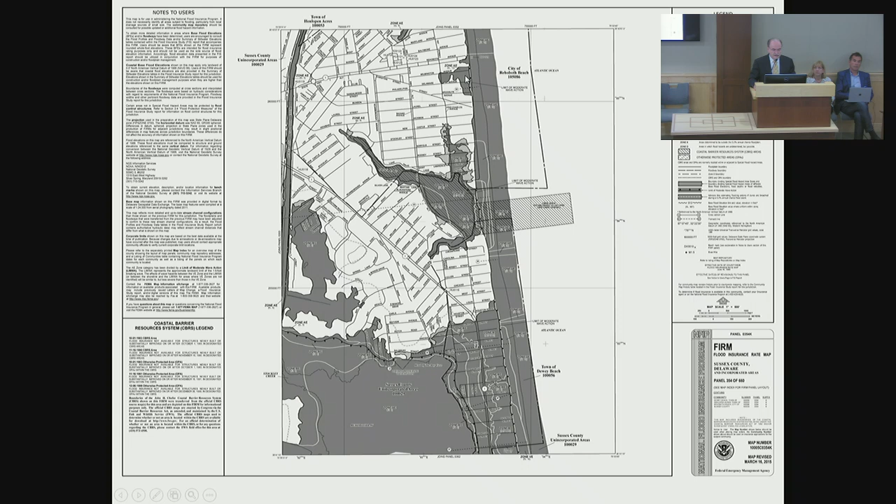If we now go to the actual FEMA maps, and we look at the map that goes from basically Olive Avenue all the way down to Dewey Beach, the affected areas are in the north portion of this picture. However, to better understand that, we need to first go to the applicant's plot and placement and their boundary survey. What I found of interest is that most plot and placement surveys are performed in a south to north direction. This one has been performed in a north to south direction. So what needs to be done is you literally need to flip it upside down to get a better understanding of where you're dealing with the flood zones.

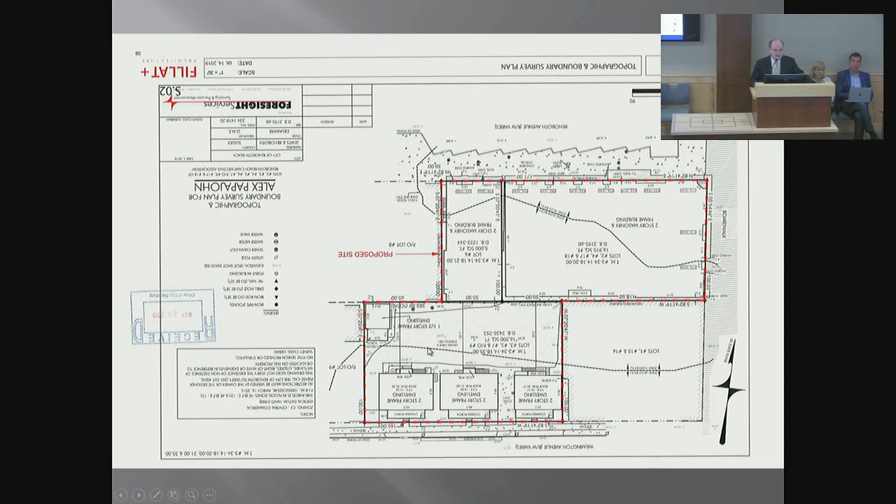As you can see here, the applicant has correctly noted the first area of the flood zone here. And now to answer my cousin John's statement that he just made, we're in the southeast corner where the sump pumps were not working. That is correct because there is no flood zone into that southeast corner. However, if you look now further down at Lot 1 and Lot 15, 16 Surf Avenue, and you see the line that goes across there, you begin to realize that this is now in the flood zone. To get a better appreciation, let's now blow up the original FEMA map, and now you can see exactly what we're talking about here.

You have to remember the properties divide here. John, where you were talking about your sump pump, it would be located here. However, in this area here, we've had significant flooding in our basement area, okay? So we need to recognize that this is the area, and it extends all the way past what the applicant has put in. This is, as we all know, one of the largest areas of flooding that occurs in Rehoboth Beach, exemplified by Hurricane Michael, where Rehoboth Avenue basically became a river at that time.

So continuing on, this is now the proposed plan with regard to how this structure would work. You're looking at our structure here. This area in between here, which was exemplified in the video just now as a walking area, is not - this is our area to get into our property. So this area here actually belongs to us. This is the retaining wall that they would use to have the egress and exit into the central core.

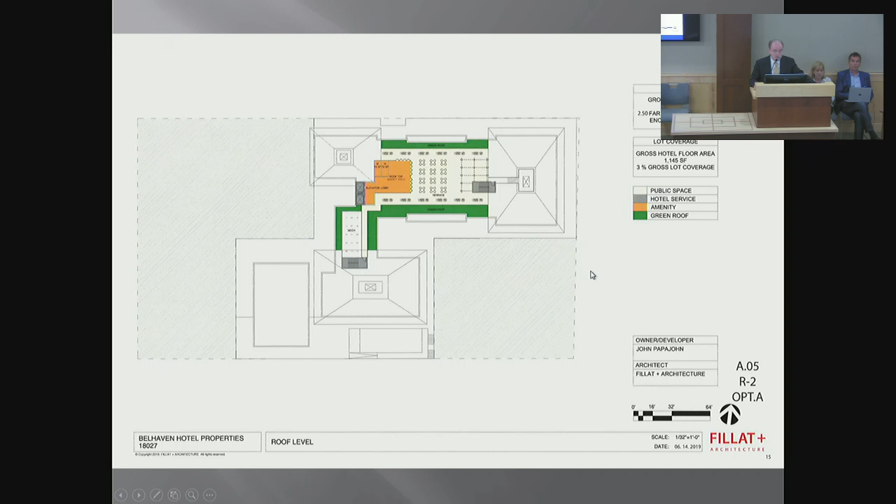Now, going further, if we now take the exact area here, this is our property here, as you can see, correctly depicted. Now, what you're looking at is the parking garage. This is the original setup, but the parking garage is going to have to be built 10 feet down. As was noted a moment ago, it's going to be at least 10 feet down with an additional 2 to 3 feet of concrete subflooring.

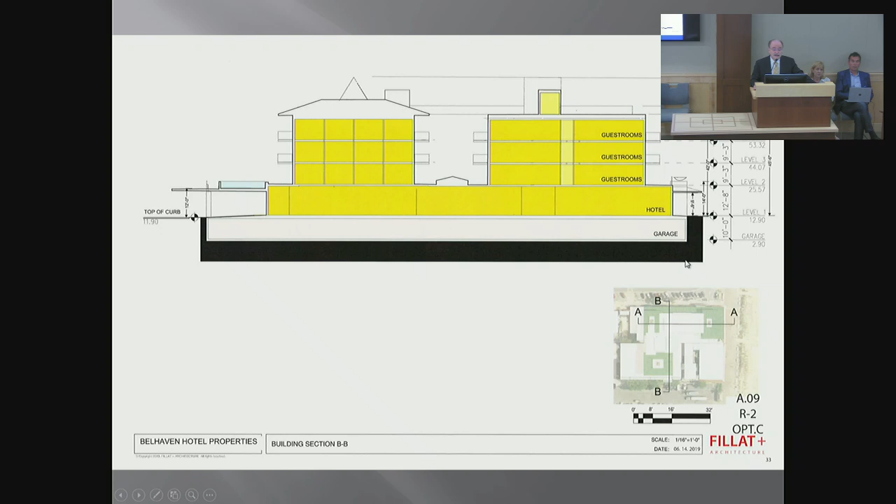As you may have seen, let me just quickly go back a second. You can see here we're already at the elevation of 12 feet. If we go to here, you can then see again the 12 feet mark. If you go to the 12-foot mark, we're already at that point.

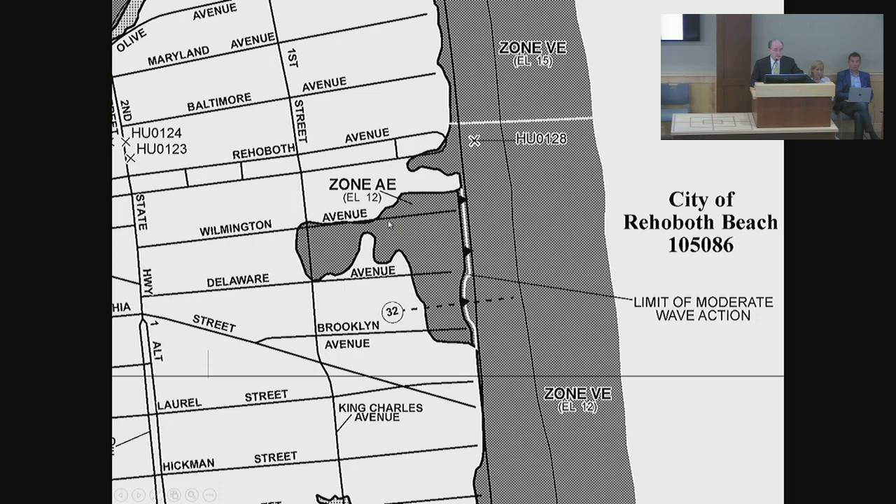So our concern is that any sort of subterranean parking garage like that is going to significantly increase the hydrostatic pressure as any pressure coming from east to west approaches and hits that wall. It's going to create tremendous pressure here, and the concern would be, depending on that pressure, any potential liquefaction of the earth soils beneath our property, and not only our property, but also Wilmington Avenue.

You have to remember, because any water that's going to hit it is going to have no way going north, no way going west, and it's all going to have to come pouring out this way to get out. So we have to keep that in perspective, and we address this issue with regard to any issues that may occur. The developer would have to take responsibility for that.

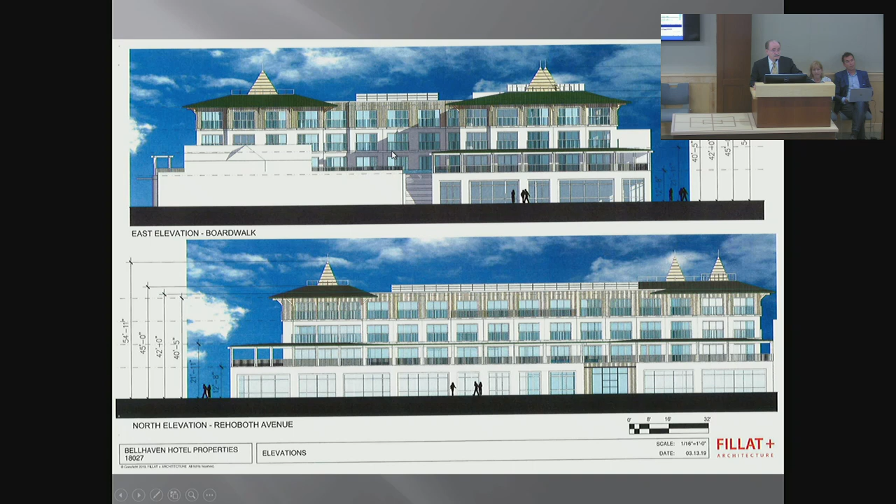Now the next thing I want to discuss is the EMS access to the central core. As we do in Fairfax County, we have to always deal with the concern for public and EMS access. Here is the original proposal the applicant submitted back in March, where you see the original was supposed to have an 11-foot, 9-inch opening to go into, quote, open space, as Commissioner Mellon noted. That was the original one, 11 foot 9 inches, supposed to go into the central core. Here was the original example of what we were talking about.

Now the applicant has cut it off. It's all been closed. There is no open space, as you were alluding to earlier in your discussions. Now, that being said, here is what has now been counter-proposed, which is a 5-foot opening here on the south side. Here's the dimensions, 5 feet, and again, our property line begins there.

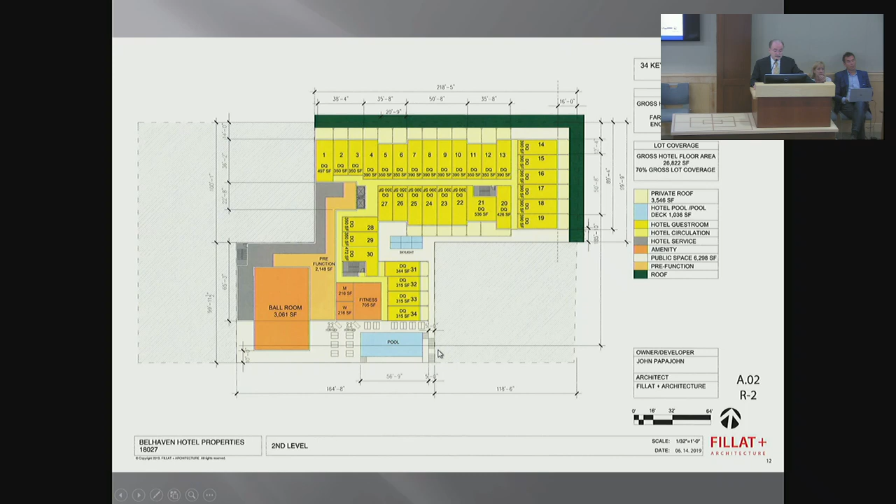Try and imagine trying to get an EMS transport up and down, a cardiac patient, something like that, with a person at the top and the bottom and the EMS people working on the patient at the same time, coming down that 5-foot opening. This is what you just need to consider when you're looking at EMS access.

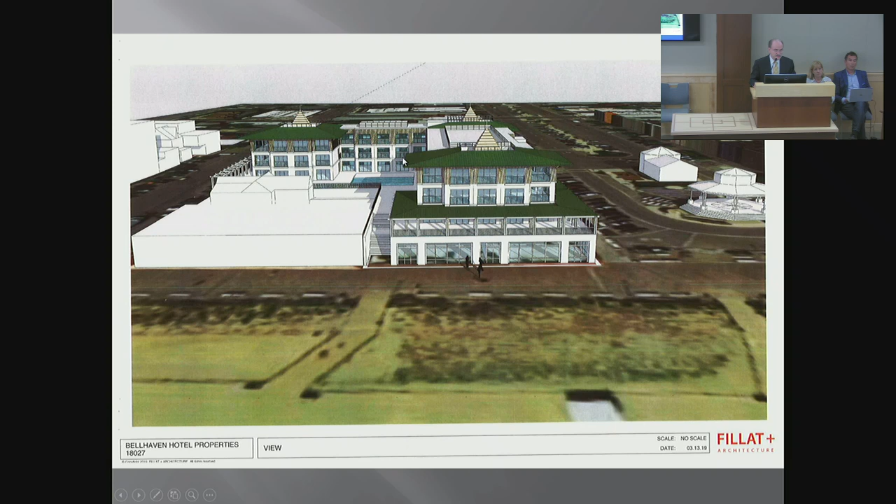Now I want to talk about, closing out, the NFPA fire access to the central core of structures. Here again was the original proposal in April where they talked about a significant opening. This opening here would provide for a substantial and appropriate access for EMS and fire heavy equipment to be able to get into that central core in this area. That was most appropriate. Now the applicant is proposing a total cutoff of that central core access.

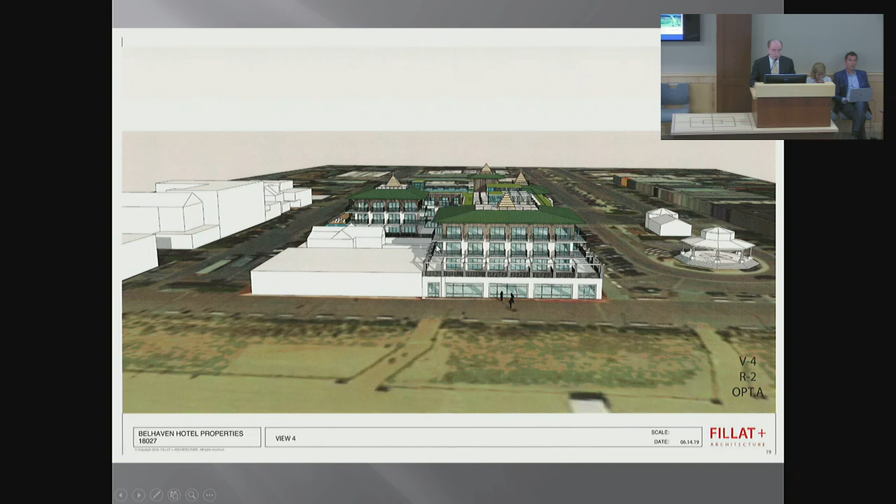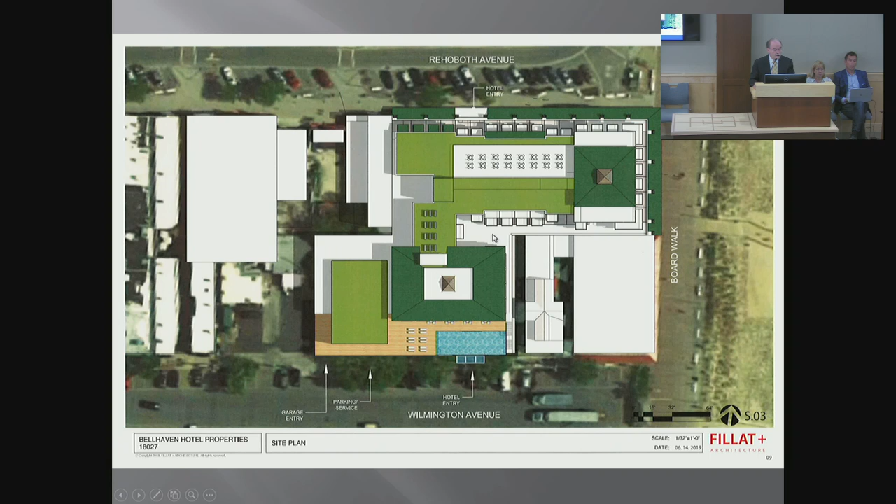There is none at this point. So therefore, you now have to depend totally on this 5-foot entrance and egress to get to the central core. Again, that raises a concern for fire and EMS. If there was to be an incident, a fire incident in this northwest corner in here, there is absolutely no way heavy equipment or any fire apparatus is going to get into that central core. It's not going to happen.

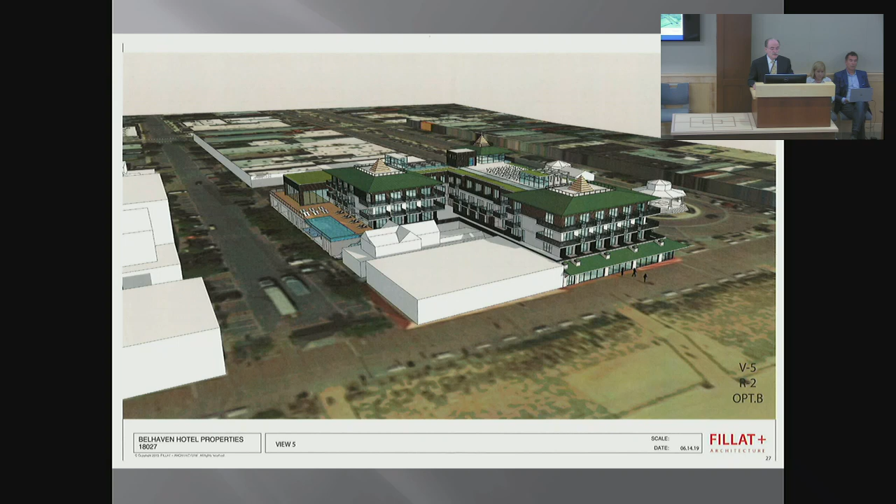And as a result, what is the point of most access for putting up water cannons? They would have to jump onto our flat roof, come up, establish the water cannons, and push the water in. Our property should not be considered the primary means of addressing fire aspects to the structure when such an event should occur. The Planning Commission should take into consideration that this is not the primary way, and though we don't necessarily object to it being a secondary means, it's not the primary way of dealing with the issue of appropriate access to that central core.

And that's it, thank you so much. Thank you.